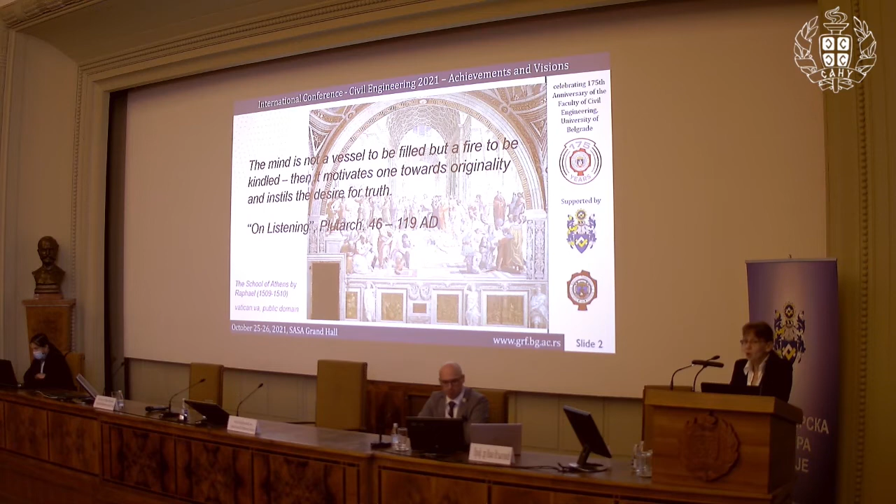I will start with the quote from Plutarch on listening that says, "The mind is not a vessel to be filled, but a fire to be kindled. Then it motivates one towards originality and instills the desire for truth." I strongly believe that this was a guiding principle in higher education from Plato's Academy to modern day universities, and I like to believe that it was also a guiding idea in the tradition of our faculty, and hope that this idea will survive in the future also.

Let us start with some facts, but before, the outline of this presentation will be, as Ivan said, the development of concrete structures through history, from the beginnings through the golden age of reinforced concrete up to the current state and future perspectives. Now we should talk about the facts. You probably know that concrete is the most widely used construction material today, globally. Its production is about 33 billion tons per year, or 4.7 tons per person per year. This practically means that men today use only water more than concrete.

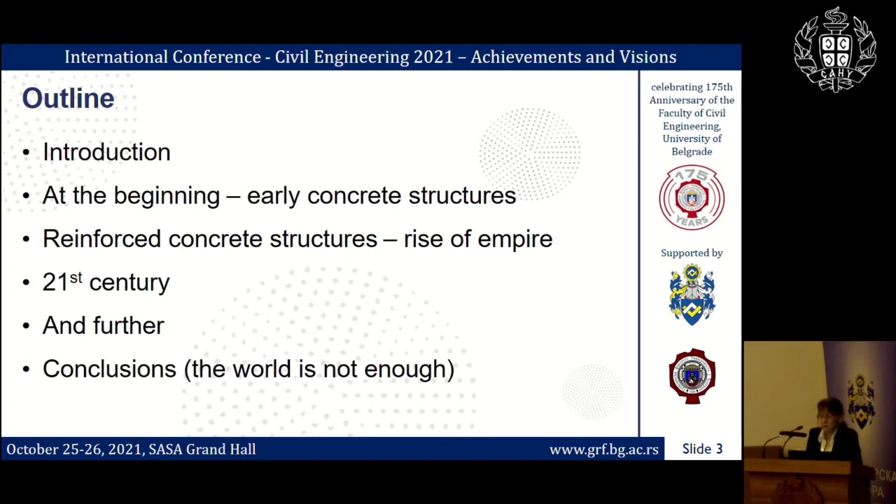Just to get an impression of the scale of this business, I will compare two famous concrete dams. One is Hoover Dam, built in the 1930s in the USA on the Colorado River, which required 2.5 million cubic meters of concrete. This was a world record then, and construction companies were so proud and confident of their work that they claimed this structure will outlast human civilization. 70 years after, another dam was built in China on the Yangtze River, the Three Gorges Dam, and more than 10 times as much concrete was poured in this dam. It is about 27 million cubic meters of concrete.

China is a concrete superpower. It produces almost half of the global concrete today, and there is an astonishing statistic about this production. Since 2003, China produces every 3 years more concrete than the USA managed to produce in the whole 20th century. So these are really enormous figures.

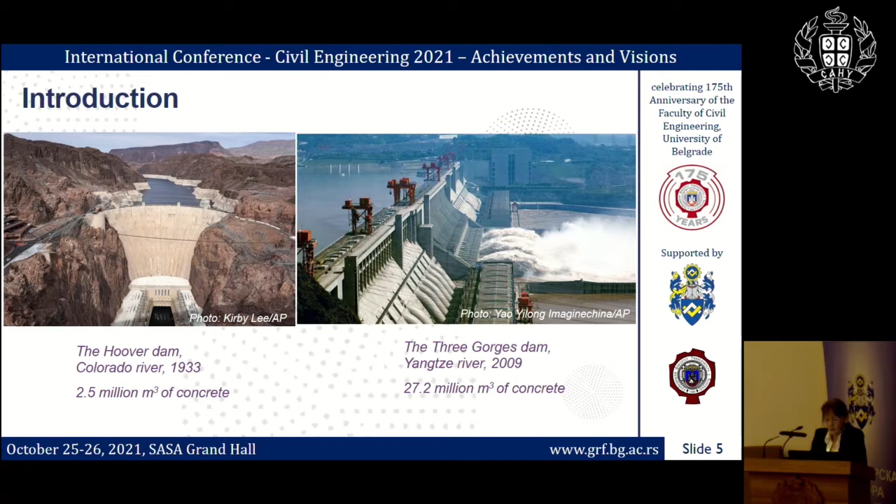All this started about 2,000 years ago in the Roman Empire. We know now that in ancient times, let's say 3,000 years BC, in Egypt, in Greece, in Babylon, in China, various types of mortars were used as binders in their stone and brick masonry works. But mostly these mortars were lime mortars.

A truly cementitious binding agent was in fact found and invented around the 2nd century BC in southern Italy, in the Bay of Naples, where a special type of volcanic sand called pozzolana was mixed with lime and water, and in that way the cement was produced, which Romans used in all their concretes. This cement was called pozzolana cement, and it enabled the first Roman concrete. This is because this type of volcanic sand chemically reacts with lime and water to solidify into a rock-like mass.

Roman concrete differed largely from today's concrete because it was not poured, it was not constructed with fluid consistency. It was in fact constructed in layers by packing mortar by hand in and around stones of various sizes. And with such type of concrete, Romans built all their structures. Among them, the most famous are the Pantheon Temple and the Colosseum in Rome. You can see the structure of the Pantheon. The clear span of the dome is about 43 meters, and it is in fact the largest unreinforced concrete dome ever built, and it is still standing.

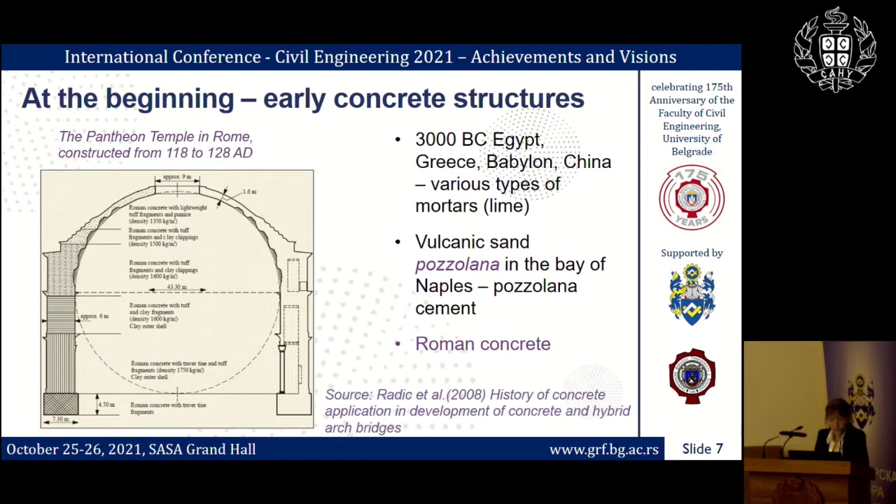The first reinforced concrete was introduced by two Frenchmen in 1848 and 1849, and this was Jean-Louis Lambot and Joseph Monier, although neither of their inventions was in fact a structure. Lambot made a boat made of cement mortar and reinforced with wire mesh, while Monier made a flower pot, a concrete tub for flowers, for trees.

And he in fact deserves the credit for the first practical use of reinforced concrete in structures. He was a clever man. He understood that this new material can have a great potential also in structures. And very fast, reinforced concrete developed on the material level, construction level, and design theory level.

And by the end of the 19th century, beginning of the 20th, we already have all types of structures made with reinforced concrete. And here I chose to show you this Ingalls Building in Cincinnati, Ohio, which was built in 1904, and which was in fact the first reinforced concrete skyscraper. It has 16 stories and is 63 meters high.

Somewhere around the 1930s, the first ideas about pre-stressing of reinforced concrete structures arose. Again, there was one Frenchman and one German, Eugène Freyssinet and Franz Dischinger, who invented the technology of pre-stressing, or the new type of concrete which we today call pre-stressed concrete, mainly in bridge construction and design. And this new technology opened up new possibilities for spans, forms, aesthetics of reinforced concrete structures.

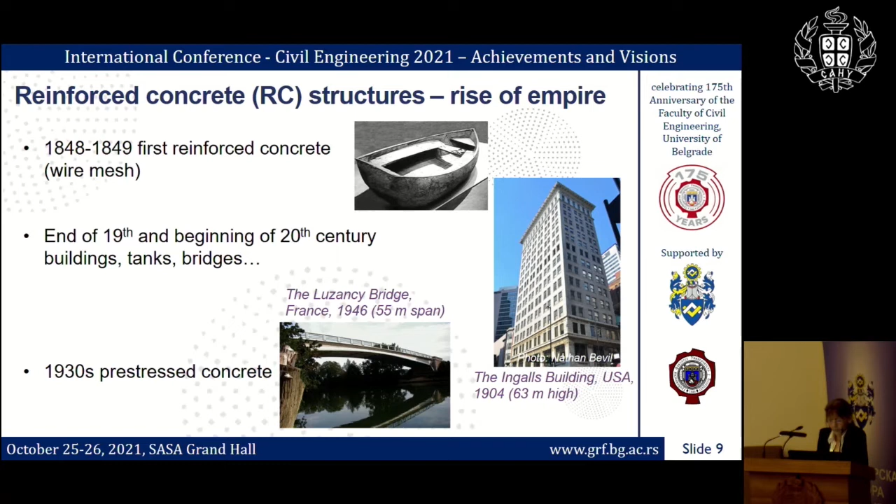Okay, I have to drink a little bit of water, I'm sorry.

Since then, reinforced concrete experienced an outstanding development on the material level, on the construction technology level, on the design level, and today reinforced and pre-stressed concrete are successfully applied in all types of structures: infrastructure, buildings, industrial construction. And we can say that twice as much concrete is used in construction around the world than the total of all other construction materials. Now the question is why concrete is so popular.

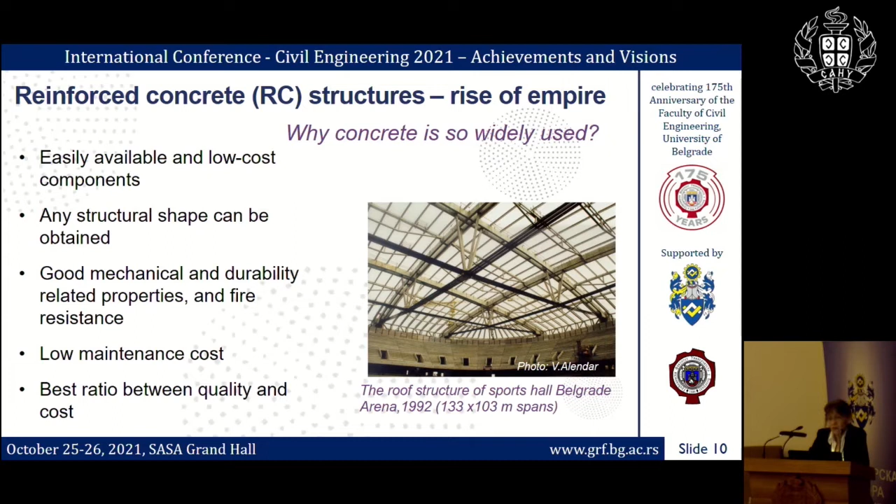There are several reasons, and you can see them here. Easily available and low-cost components, meaning concrete is cheap. Any structural shape can be obtained, good mechanical and durability-related properties, good fire resistance, and low maintenance cost. In a word, the best ratio between quality and cost.

Now we come to the 21st century, and we all know that the modern age requires, no matter which construction material we are talking about, fast, quality and cost-effective construction, as well as functional, robust, durable and sustainable structures. In the last 40 years, the composition of concrete was significantly improved, and we now have many new types of concretes. It also developed into modern cement composites with very high mechanical and durability performance and improved cracking and fracture behavior. This happened mostly owing to the invention of chemical admixtures like plasticizers and superplasticizers, adding different mineral additions, the invention of fibers, and so on.

At the same time, mixing and casting methods were also improved, and new, innovative construction technologies were introduced. Design theories grew from intuitive, through the working stress method, to the performance-based design which we use today for design of concrete structures.

We all know, of course, that the 21st century imposed the sustainability imperative upon all human activities, and construction technology is no exception to this rule. And that is why we need our traditional technologies, methods, and practices to adapt to fulfill the new requirements, and this led to a special type of concretes, which we call today green concretes or green concrete solutions.

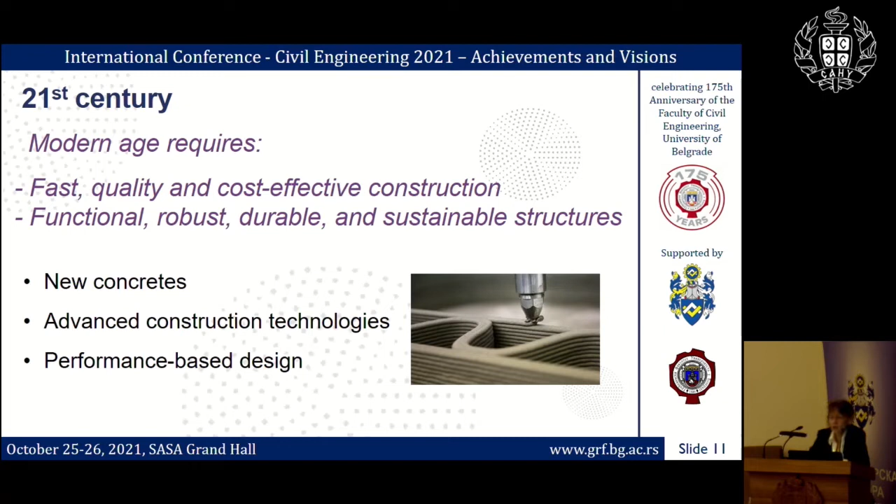Now I will say just a few words about all of these new concrete types, which are mostly developed in the 21st century. First one is so-called fiber-reinforced concrete, which is a type of concrete where fibers are added to improve concrete's cracking and fracture behavior. And if you put short fibers in concrete mix while mixing it, they will be randomly distributed and embedded in the cement matrix, so they will, as you can see on this figure, bridge the cracks.

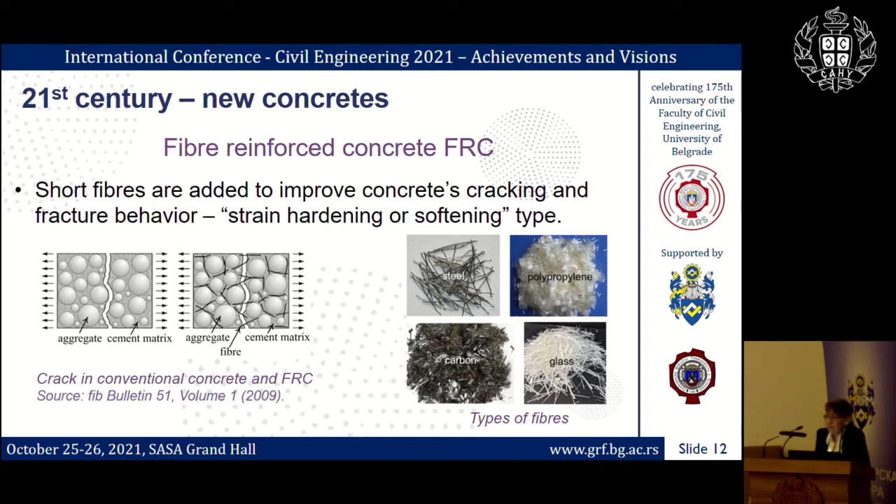So fibers enable reduced cracking, generate post-cracking residual tensile strength with relatively large tensile strain, and in that way turn the brittle behavior of concrete into, let's say, strain hardening or strain softening type. We usually use steel, carbon, glass, plastic fibers for fiber-reinforced concrete. Natural organic fibers are also used, but they have an aging problem, and care should be taken when they are used for structural concrete. Some properties that are improved with this type of concrete you can see here.

So several times higher fracture energy, higher resistance to impact stresses, shrinkage cracking minimized, better resistance to corrosion and abrasion, and high resistance to elevated temperature if plastic fibers are used. Due to that, this type of concrete is usually applied in industrial floors, precast lining tunnels, as you can see here, pipelines, in repair works, in shotcrete, and now there is ongoing research related to the application of this concrete in structures without any conventional steel reinforcement.

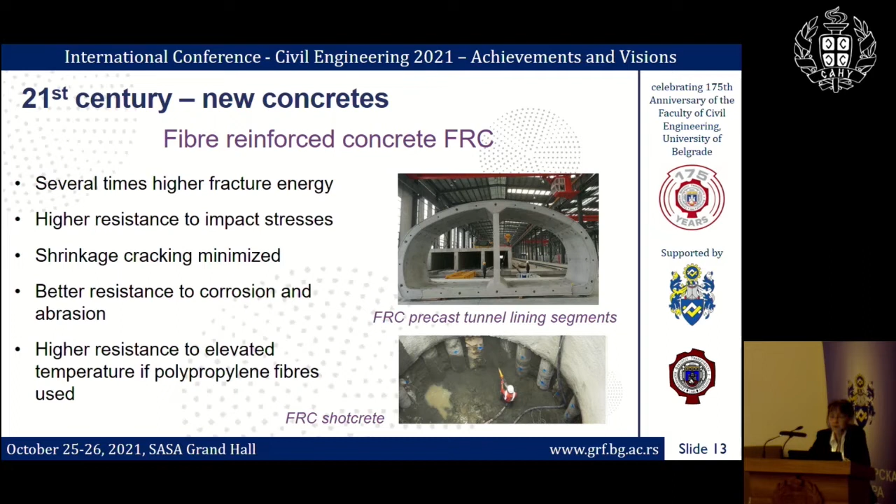If you use long fibers instead of short and put them in the direction where you anticipate the tensile stresses and strains, you will get the so-called textile reinforced concrete, which is generally concrete reinforced with non-metallic reinforcement, whether in the form of bars, 2D or 3D meshes, and usually carbon, glass, and basalt fibers are used. You can see these 2D or 3D meshes, which are made of carbon, glass, or basalt fibers. And since it looks like a textile, this type of concrete got that name, and not only looks like, but these meshes are produced in a similar way as textile fabric.

At this moment, this type of concrete is used only for strengthening of reinforced concrete structures, while application in new structures is still limited to initiatives mostly in Germany. And you can see here 2 examples. One is a footbridge built in Germany in 2004. Instead of steel reinforcement, it has glass bars, and the span is 8.6 meters.

And on the other figure, you can see, as they call it, the first building made of carbon concrete. It is called the Cube, and it is at the moment under construction at Technical University of Dresden on their campus. It is in fact a structure reinforced with carbon meshes, so it is a textile reinforced concrete. The Germans like to call it carbon concrete.

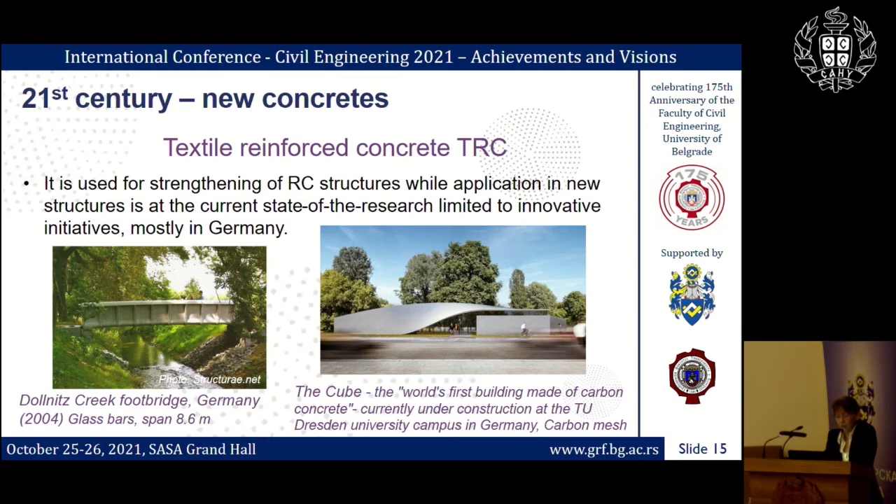Another new type of concrete which was developed in the 21st century is so-called ultra-high performance concrete. Invention of plasticizers and superplasticizers enabled us to produce concrete with compressive strength higher than 50 to 60 megapascals, which was in fact the upper limit for ordinary normal strength concrete. Since the 1980s, first high strength concrete was developed with strengths up to 100, 120 megapascals. And since 2000, we have developed concretes with very high strength, which, as you will see, can be up to 800 megapascals.

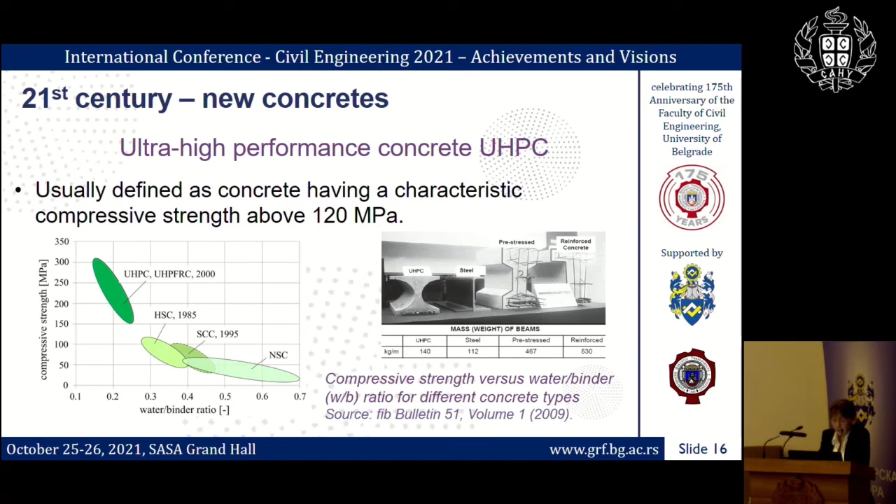This type of concrete is in fact a cement composite, which contains a large amount of ordinary Portland cement. It must have a low water to binder ratio. It must have highly reactive additions such as silica fume. It has only fine aggregates, sand, with quartz powder, and of course it must have high performance plasticizers. Depending on the temperature of curing, it can reach 200, 400, 800 megapascals if you also apply pressure. Tensile strength and modulus of elasticity are also much higher than for conventional concrete. It has excellent durability, but it is a brittle material, so to compensate for brittle behavior, usually fibers are added, and that's how we get ultra-high performance fiber-reinforced concrete.

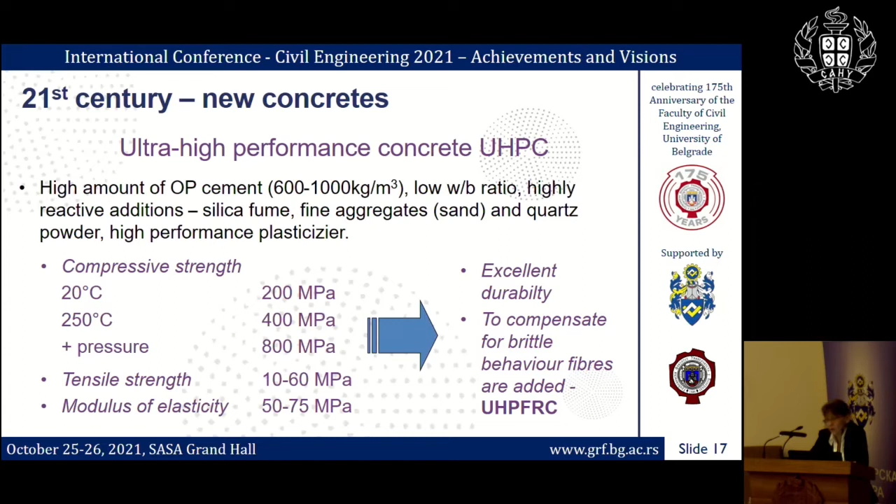Here I'm showing you a few examples of the application of this type of concrete. The first one I chose because it was the thinnest concrete shell ever built. This is the Shawnessy railway station in Canada from 2004, and ultra-high performance fiber reinforced concrete was used for these precast canopies, and the thickness of this shell was only 18 millimeters, so it's as if we are looking at a steel structure.

Professor Veljković, am I right?

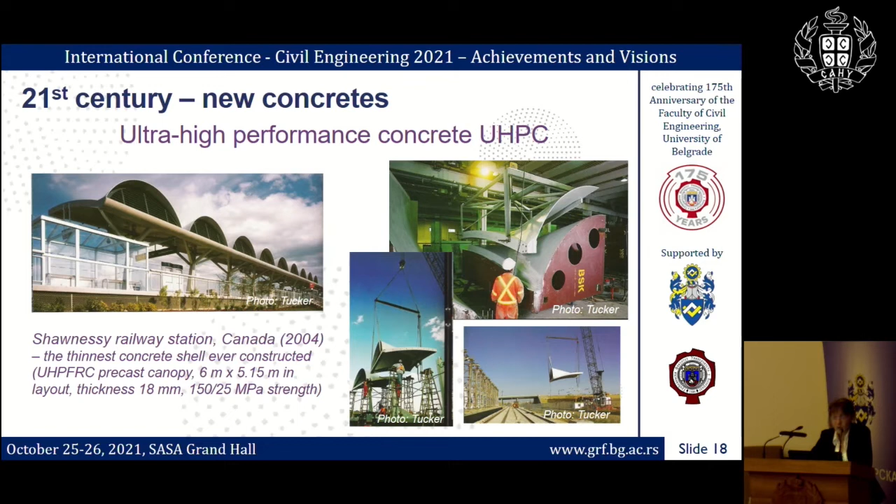Also, the sustainability of such concrete is questionable, because although you can largely reduce the volume of your structural members using this type of concrete, and you can enable prolonged service life because of its excellent durability, still you need high amounts of cement and silica fume, and high energy consumption, and therefore the sustainability of such concretes is questionable. So far, they are used only in extraordinary projects, mostly in bridges, and as architectural concrete, as you can see here.

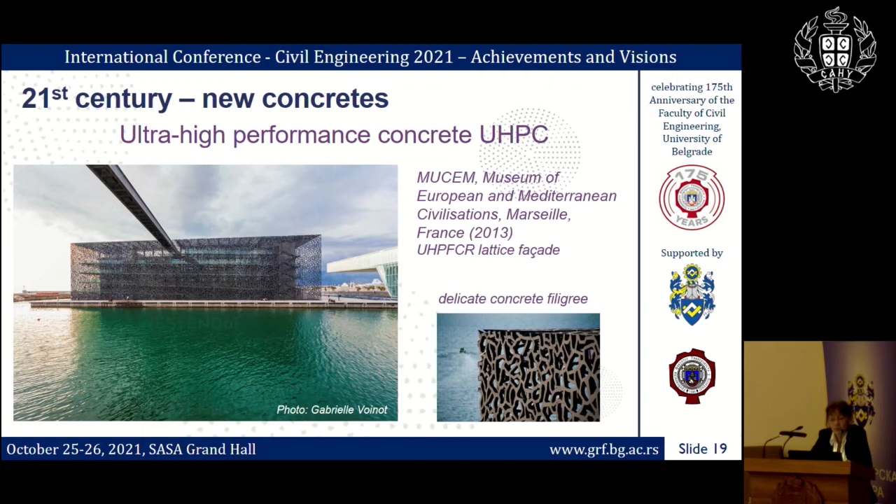Self-compacting concrete was also developed in the 21st century. This is a concrete which de-aerates and flows without the application of compaction energy while staying homogeneous during the whole placing process. It means it can be cast without vibrating, and it has a larger amount of paste. Due to this fact, it can be cast in this way. The paste usually consists of cement and large amounts of fly ash or limestone powder, and of course it must have superplasticizers.

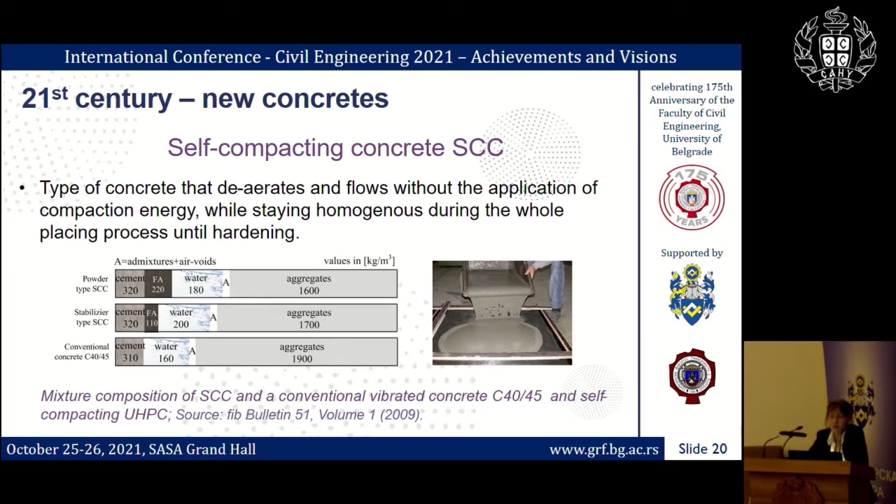Finally, green concrete. We all know that the construction industry imposes large environmental burdens: large consumption of natural resources, especially fossil fuels, large emissions of various substances that pollute the air, the soil, the water, and also large amounts of generated waste. Concrete in particular has a problem with large CO2 emissions because of cement production, which is responsible for almost 7 to 8% of the global CO2 emissions in the world.

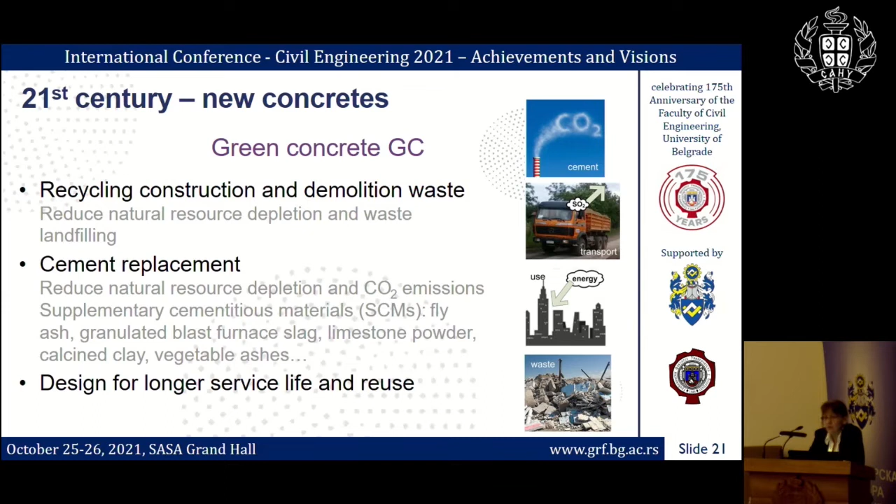So it is of crucial importance for us to find ways of greening concrete construction, the concrete industry in general, and this is done mostly in these three ways that I put here. One is recycling of construction and demolition waste, the other is the replacement of cement with so-called supplementary cementitious materials, and the third is on the design level, by design for longer service life and reuse.

Green concretes can provide us with lower environmental impact. They can be produced with comparable mechanical properties as conventional concrete, but they usually have lower durability, especially when we are talking about carbonation resistance. Whichever supplementary materials or filler or type of aggregate we use, our aim is always to keep the structural performance of concrete at the desired level.

Up to now, extensive research in this area was performed, and although we already have technologies and design recommendations for such type of concrete, their application and use in structural concrete is not yet standardized. And if it is allowed, it is with strong limitations that cancel eventual benefits.

What to say about construction technologies in the 21st century? There is a saying in the construction world that construction hasn't changed much since the times of the pyramids. It's all about moving workers and materials. And it was true until the emergence of 3D printing technology. The highest level of industrialization and automation that we had in the concrete industry was in fact precasting, prefabrication of structural members. But nevertheless, using precasting in combination with prestressing and advanced construction machinery, we were able to build impressive structures, and I will show you some examples of them.

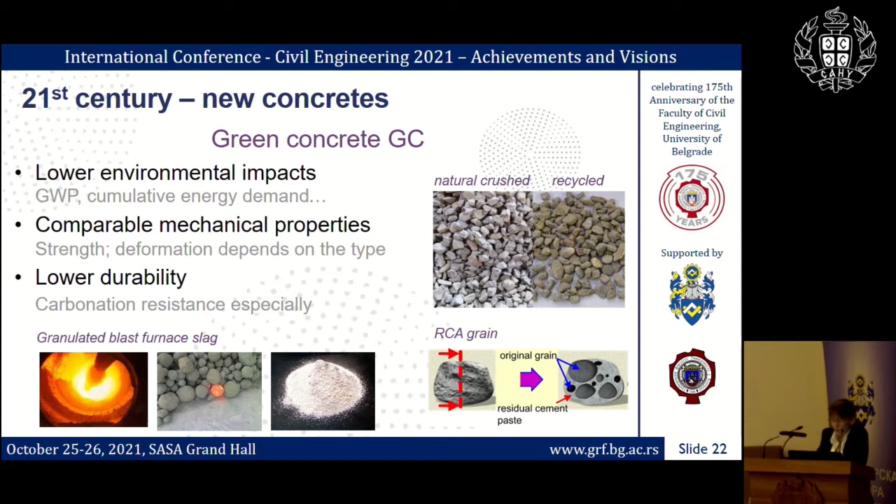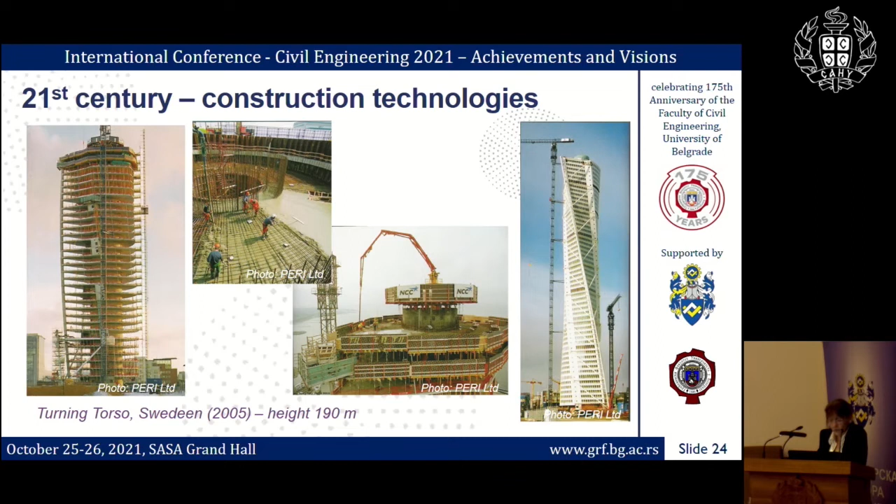The first one that I chose is the Turning Torso, which was built in Sweden in 2005 with a height of 190 meters. You may ask why this building was called the Turning Torso. You will see now. This is because Santiago Calatrava, the designer of this building, had such inspiration. So one man's idea, many men's hard work to realize it, because it was not easy to build a structure which rotates 90 degrees from its bottom to its top. But everything was built with conventional construction technologies.

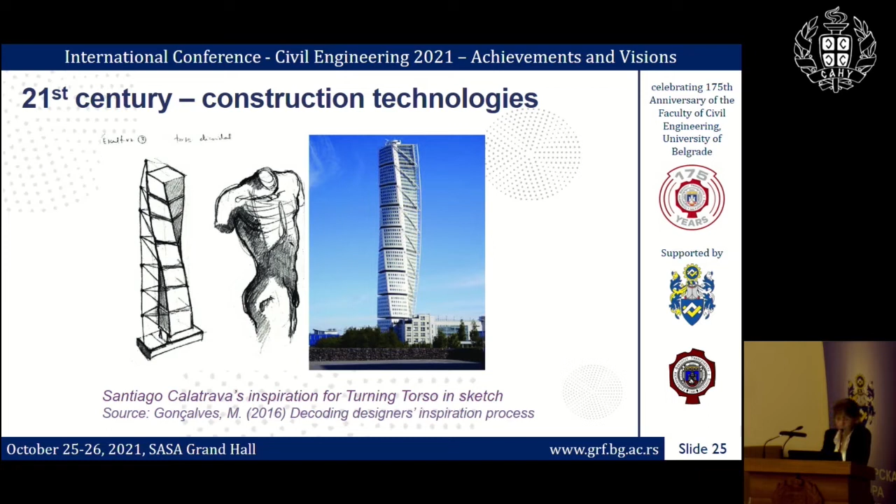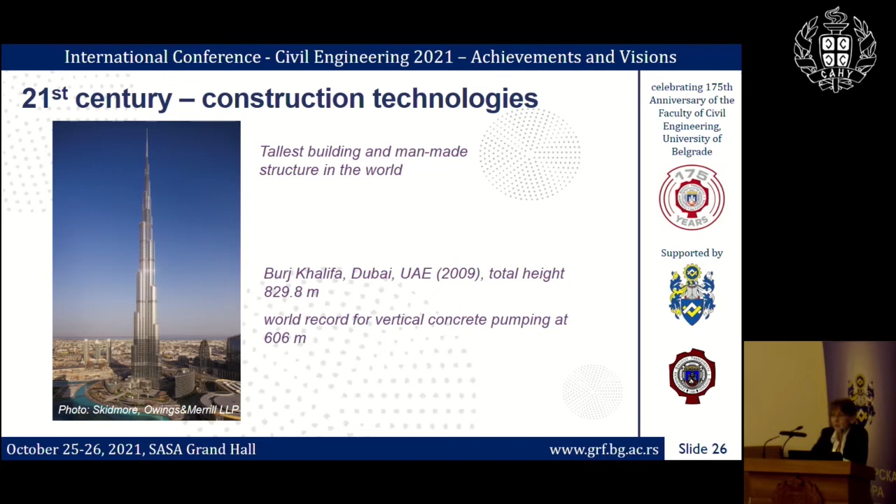Then, of course, I have to mention the tallest building in the world and tallest man-made structure. This is Burj Khalifa, you probably know. It was built in 2009 in Dubai. Its height is almost 830 meters. For the construction of this building, a special concrete pump was created, which set a world record for vertical concrete pumping at 606 meters. That enabled, in fact, the construction of this building, whose primary structure is conventional reinforced concrete.

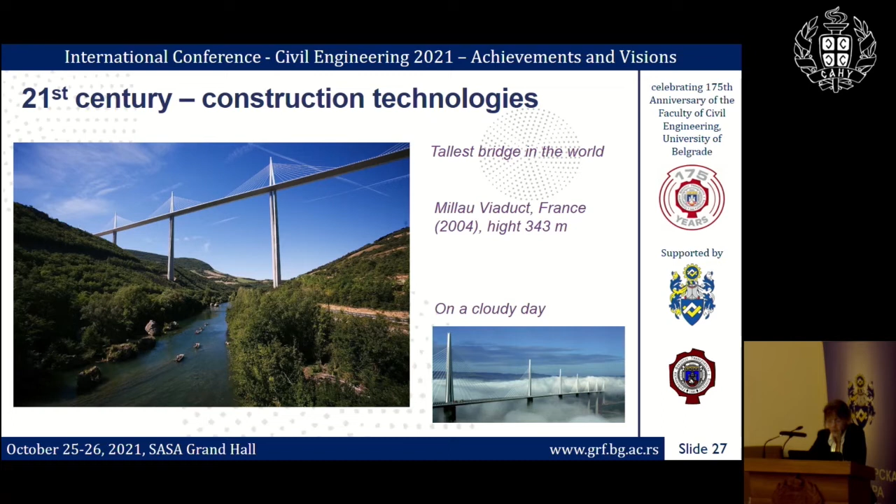Then there is the tallest bridge in the world. It's the Millau Viaduct in France, built in 2004. The tallest column has a height of 343 meters. This is higher than the Eiffel Tower in Paris. Again, conventional construction technologies.

Since 2000, we introduced a special robotic construction technology in concrete construction, which is called 3D printing. With its introduction, radical changes in construction began that parallel the changes automation and robotics brought to the industrial complex in the 70s. This is an additive construction technology. The building is created from the ground up in a layer-by-layer manner using giant robotic arms. Entire buildings can be printed on site, and this technology allows faster construction, building complex designs, lowering labor costs, producing less waste, and construction under harsh and dangerous conditions like in space.

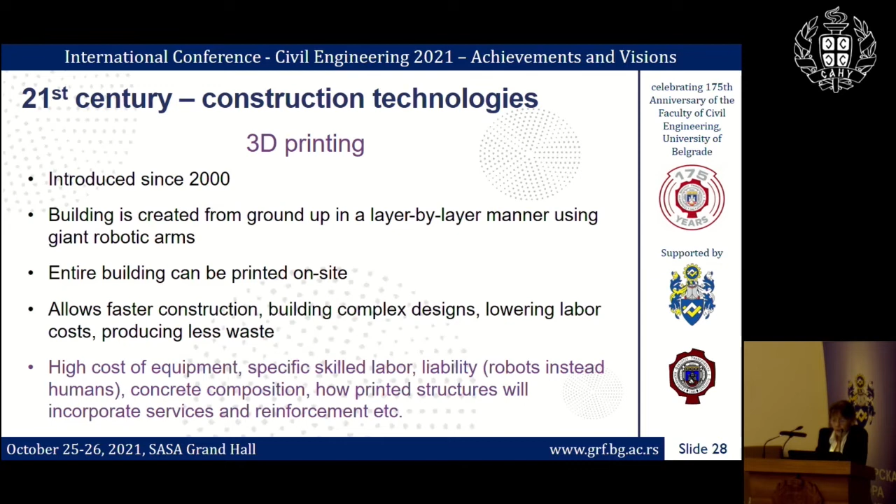Of course, there are many unresolved questions, such as the high cost of equipment, and specific skilled labor is needed. There is a question of liability if you use robots instead of humans. There is a question of adequate concrete composition, how printed structures will incorporate services and reinforcement, and so on. Due to already developed giant robotic arms, we now have outdoor printing, and we can print whole buildings. You can see this is the arm. You can see some examples here.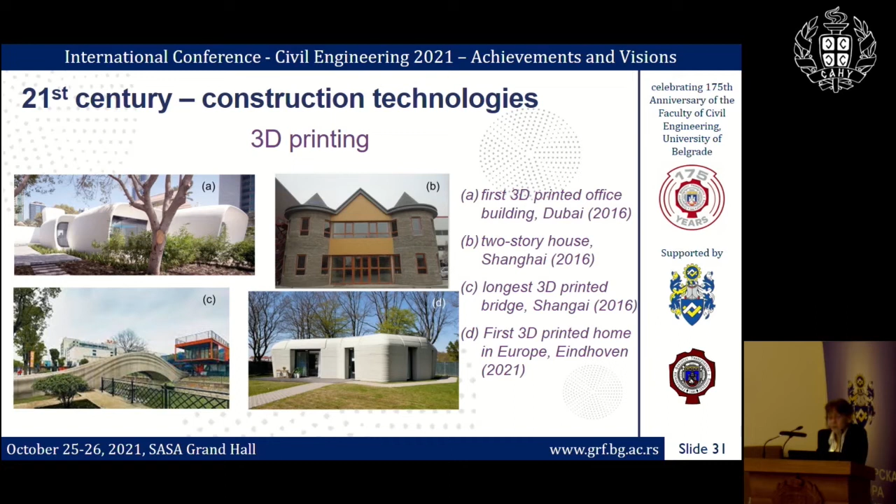I will not talk much about design since I don't have time anymore. I will just say that design of concrete structures progressed from intuitive through working stress methods to performance-based design, which is based on limit states.

And I would just like to say that the Model Code 2010, this is a concrete code, European concrete code, was first to introduce the performance requirements for sustainability, and they were related to impact on environment and impact on society, but this is, so far as I know, the only code which introduces sustainability as a design criteria.

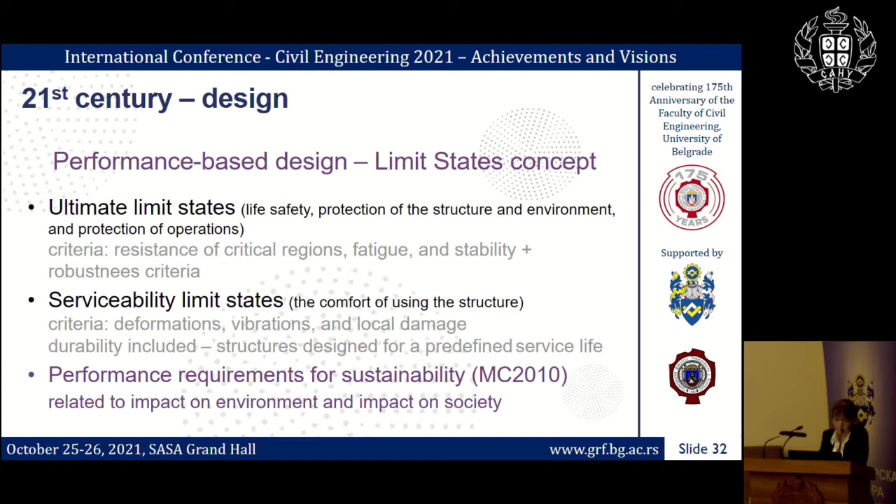Further development of modern cement composites, like ultra-high performance concrete, textile, fiber reinforced concrete, self-compacting concrete. But since the cost and the impact on the environment of such cement composites is much larger than in the case of conventional concrete, research is needed and efforts are needed to reduce the cost and the environmental impact of these new concrete types to enable their wider application.

Then I didn't have time to speak about one special technology, which is called fast carbonation of recycled concrete aggregates, which is used for decarbonation of the concrete sector. It is a very interesting technology, and it is expected to be developed at large industrial scales very soon.

Then we should incorporate all these new concretes, especially green concretes, and performance criteria for sustainability in new international codes, of course. And, of course, fast development of 3D printing technology is expected in the future.

Concrete came a long way from the Pantheon temple to Burj Khalifa. In less than 200 years, it developed into a cost-effective, versatile, durable construction material with mechanical properties good enough for most of our structural purposes. But still, recently, concrete got a very negative connotation in various types of media because of its impact on the environment and on mental and physical health and so on.

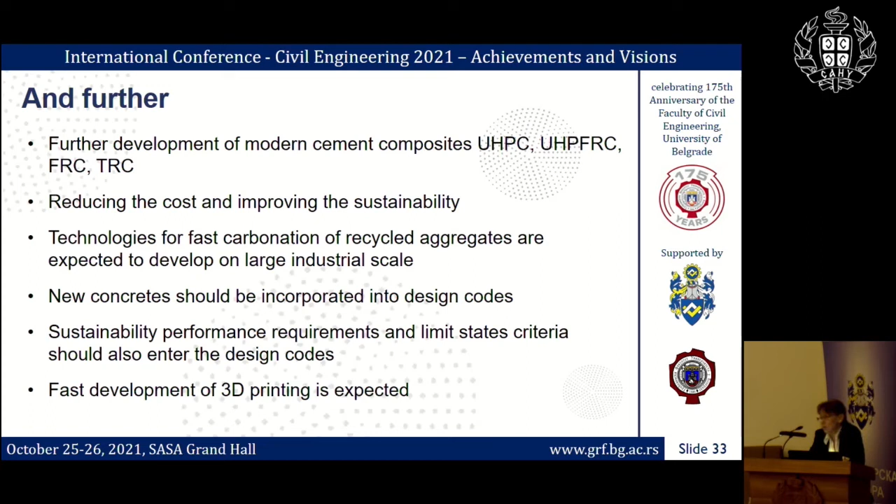Still, we all want to live in cities. Still, we all want to pay the lowest price for our homes. We all want to use cheap energy. And almost half of the world's population already lives in cities. This was something somebody was already speaking about.

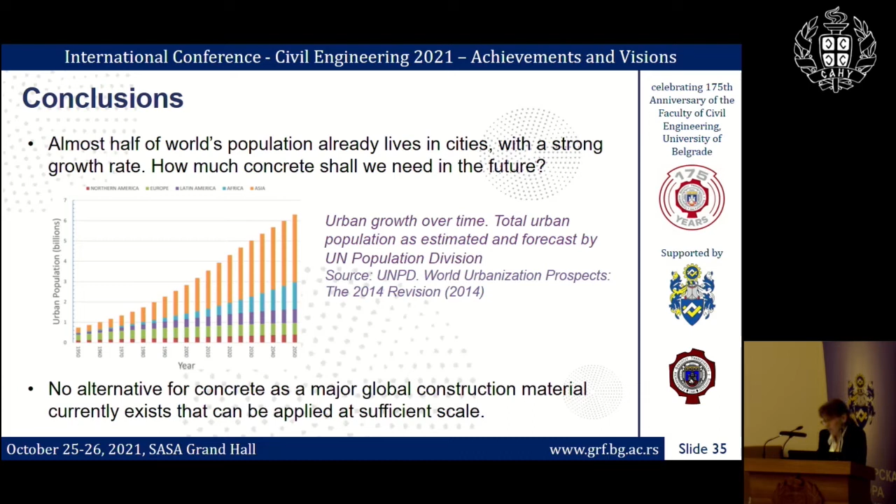On the other hand, no alternative to concrete as a major global construction material currently exists that can replace concrete at sufficient scale. I don't have time to elaborate this issue, but believe me, this is a fact. So we are stuck with concrete.

So we need to raise the trust in the use of green concrete solutions. On the technology level, to develop more efficient and cheaper production technologies. On the economy level, to implement measures to stimulate the use, and on the society level, to transfer knowledge from science to industry, and to constantly educate about the benefits of green concrete solutions.

And finally, if there will be no place on this planet for concrete, there will be on others, certainly. 3D printing is in a position to be a viable solution that offers key benefits for our buildings' future. This robotic technology can enable us to build habitats on Mars and the Moon, and in fact, we are already preparing mix designs and compositions for concrete which can be produced on the Moon and Mars. So, for concrete, we can say the world is not enough.

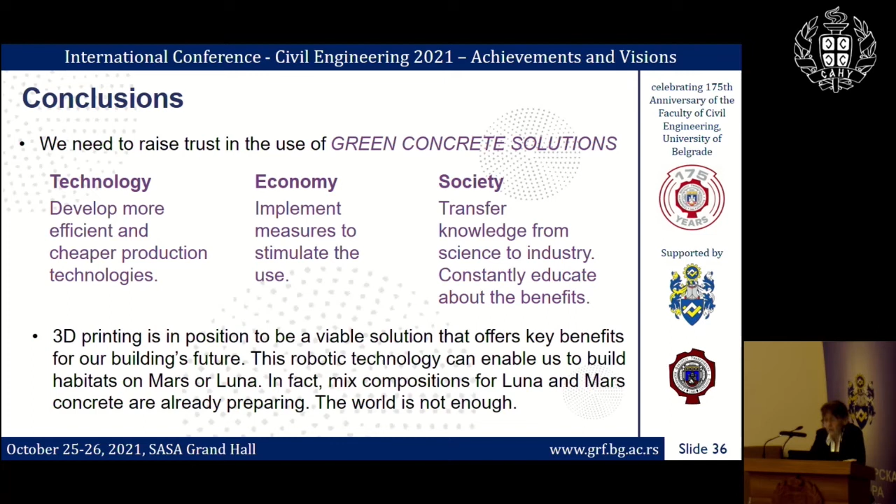Dear Professor Marinković, thank you for this inspiring presentation, this historical overview, but especially for sharing with us your vision of concrete structures. I would say that this was a journey by concrete path to the moon and back.